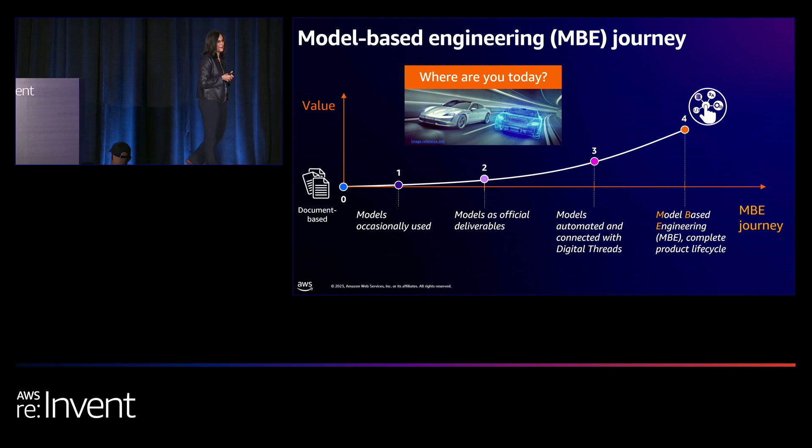That's why it is critical to build a closed-loop digital thread. As Peter Bilello, president and CEO of CIMdata, mentioned recently in a webinar on product lifecycle management, cloud is the technical foundation for the digital thread.

Now, diving deeper into the product engineering and development activities, we identified 6 specific areas where AWS and our partners play a key role for our customers.

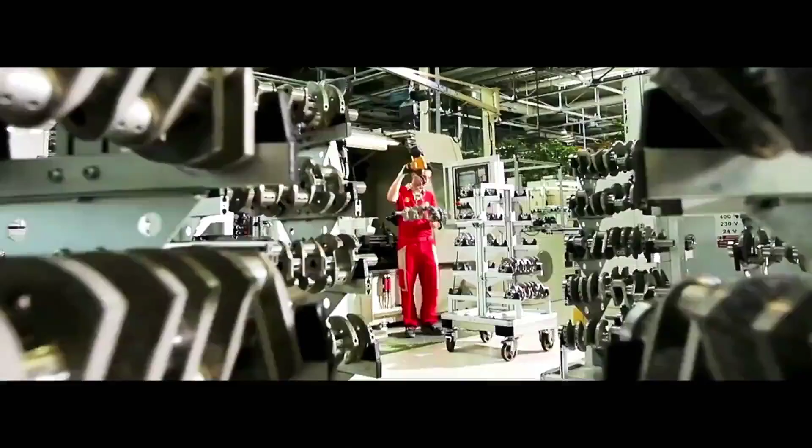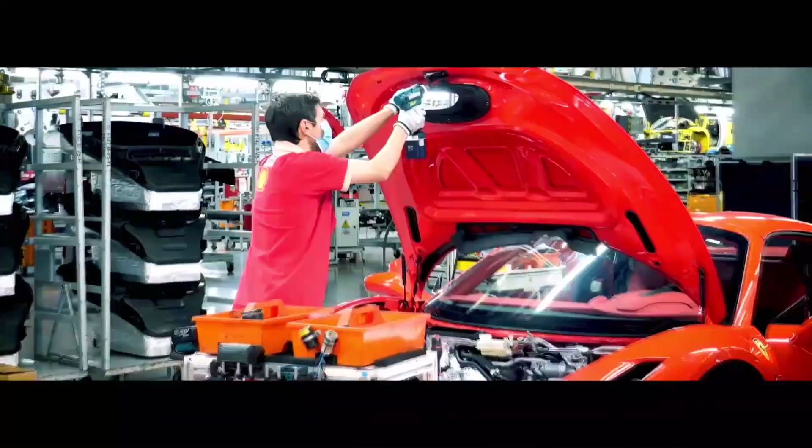How do you tell the story of a passion? A passion born of the spirit of racing, carried in the hearts of enthusiasts everywhere, that defies time, age, language, and culture, that unites young and old, individuals and teams, employees and owners in a lifelong sense of belonging. How do you capture the constant desire to push boundaries, master new technologies, adapt and evolve, to blend tradition and innovation, yet still stay true to your DNA? How do you capture the essence of what must be lived to be understood? For this is the essence of what it means to be Ferrari - to epitomize the power of lifelong passion, the beauty of limitless human achievement, creating timeless icons for a changing world.

We cannot describe passion. We can only live it. Fantastic. Our passion lives on emotions which transcend the road and track.

It sets ambitious targets and expectations to match tradition with innovation. It is required to feed the ability to provide revolutionary technological solutions with exceptional artisanal craftsmanship, which allow us to create icons that stay timeless.

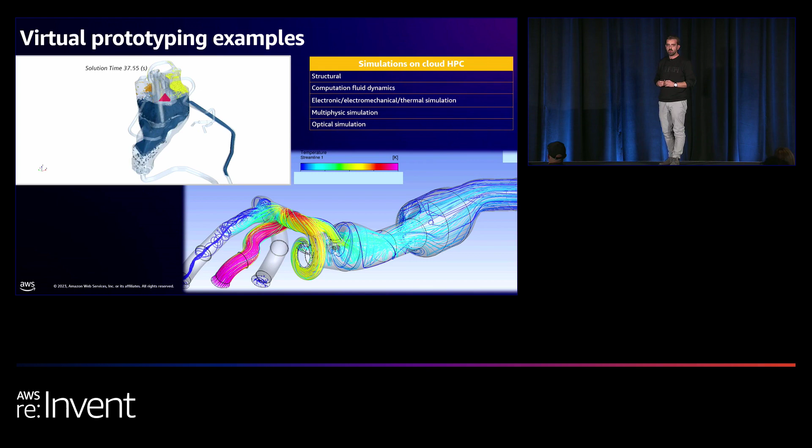Even if CAE gives us the opportunity to solve typical engineering problems like structural behavior prediction and fluid mechanics simulation, it was required to rethink another approach regarding how to deliver the computational resources to our engineering teams. And here the cloud comes into play.

Let's see a typical application field for CAE, which is high-performance computing, or HPC. Our HPC hybrid architecture in the AWS cloud leverages some cloud-native services. Let's see some of them.

First of all, direct connect between AWS and Maranello for a high-speed performance network. Second, AWS ParallelCluster, the core component of our hybrid architecture, with its compute nodes for calculations and the head node for orchestrating them. Third, the RDBMS service in Amazon Aurora for keeping track of our job scheduling history.

And finally, Amazon FSx for Lustre for high-performance NFS sharing, plus Amazon S3 for data tiering and keeping our storage costs low.

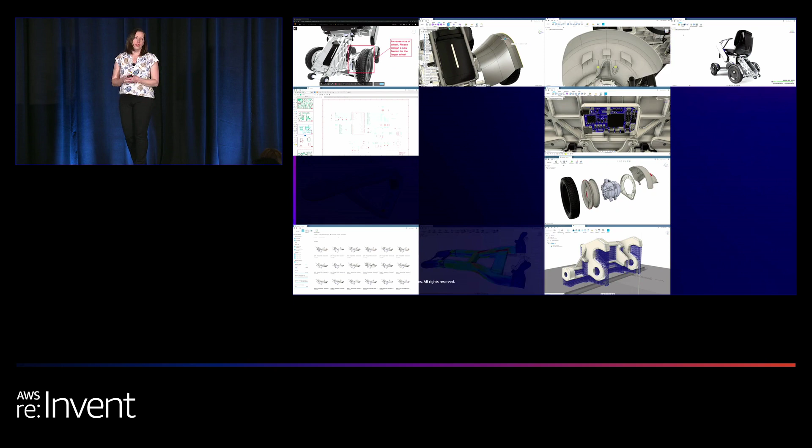And underpinning all of that is AWS. We need a connected technology stack to connect things like design and compute to create workflows that flow within and across all of these industries. A prime example of this is with Autodesk Fusion. Fusion connects all of your tools in the manufacturing space. So design, simulation, documentation, manufacturing, electronics, rendering, you name it, all in one platform.

We started Fusion because we saw that you needed a single environment for design and make workflows, a place where data can move easily for different kinds of teams and people to work together across different systems and locations. And partnering with AWS, we've been able to optimize how we leverage the cloud so that we can offer this tool with really sophisticated workflows at an accessible price.

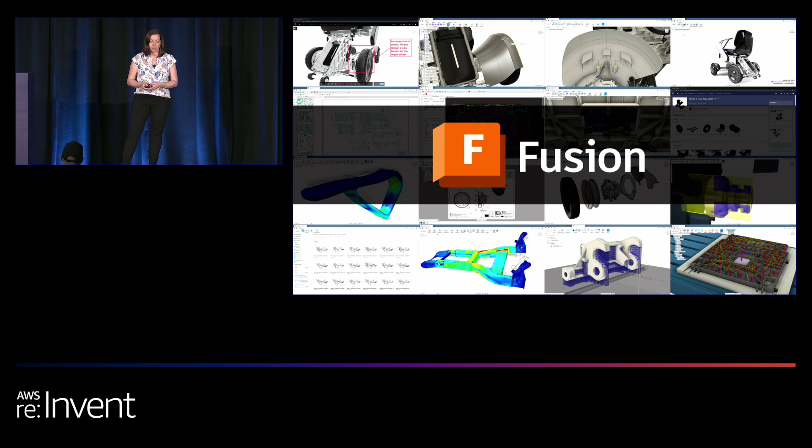And so we are using tools like Autodesk AI tools to really help wrangle that complexity. So we have Autodesk AI tools in Fusion and in our other software across the Autodesk Design Make platform. So we're a software company.

In order to create these AI-powered tools, we require a lot from our technology stack. And it's the kind of things that we get from AWS. We need high performance compute in order to do a lot of this computation. You, our customers, trust us with your business. 6 million people trust us with their business. We have to keep your data secure, and we have to offer our services to you reliably. And as we're seeing very acutely this year, technology is changing all the time. So we need to be flexible and scalable to absorb new innovations and scale to greater sizes and further scope.

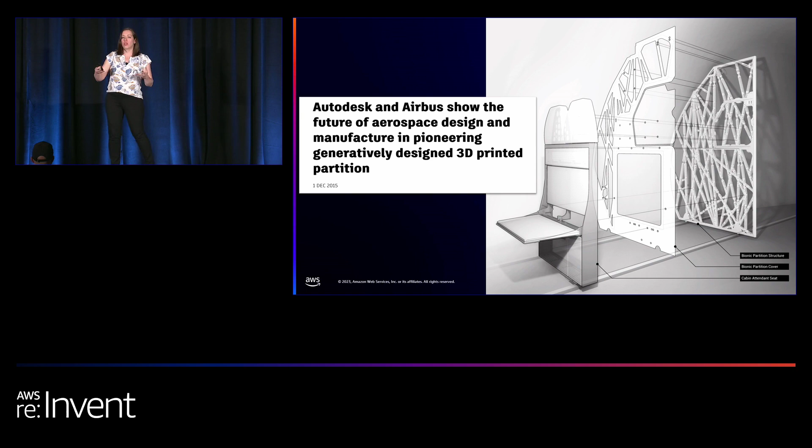And because we know all the equations, we can see the impact of different variables. And so what it offers to you is the ability to understand those trade-offs, to see what happens if you try to do this faster, what does that do to cost? If you try to make it lighter, what does it do to strength? And so you can actually see the interplay of those variables.

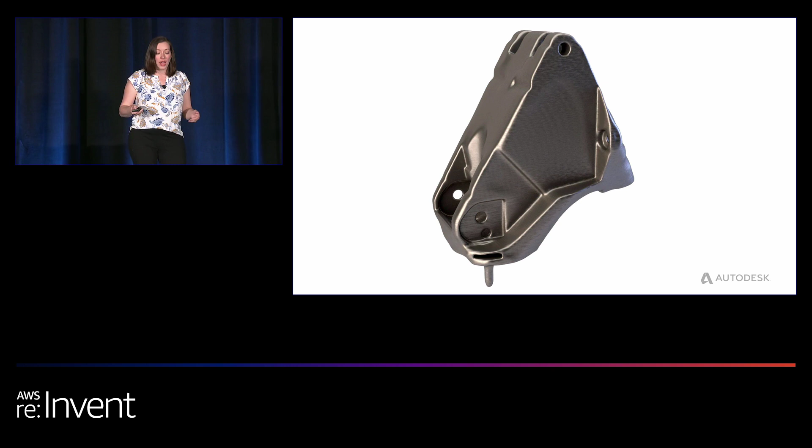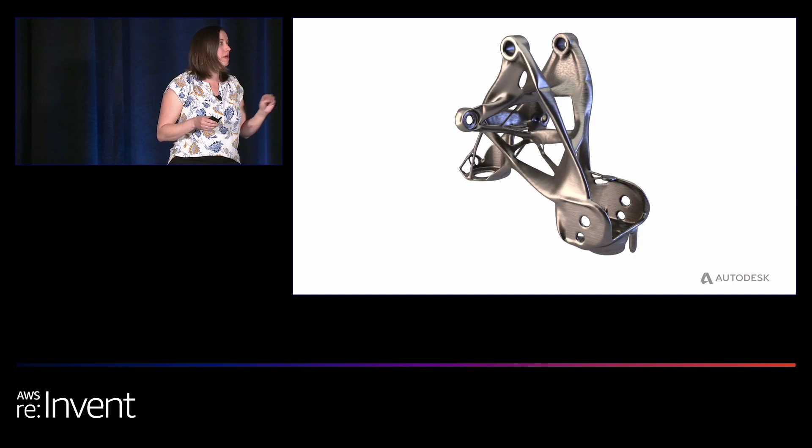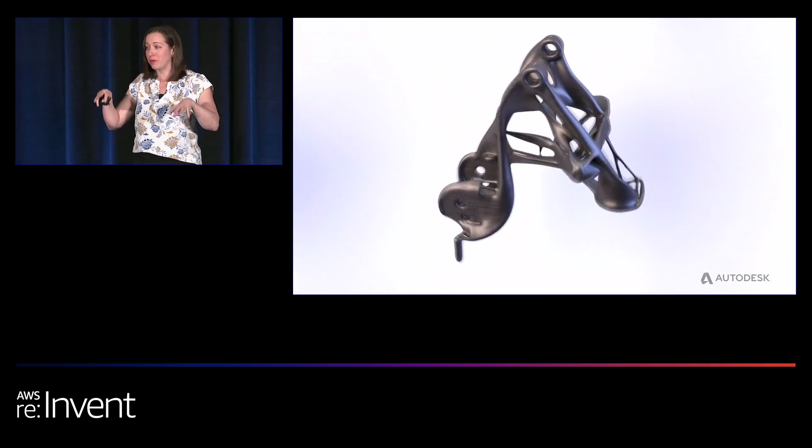So one example of this is General Motors used generative design and additive manufacturing to design and build a functional and lightweight seat bracket. Their goal was to optimize for weight, or mass, technically. So in the past, human designers would have made 2, maybe 3 designs for this challenge. But those human designers partnered with our software, made 150 viable options. We actually had to train a machine learning model to group these options to make it possible for users to navigate these choices.

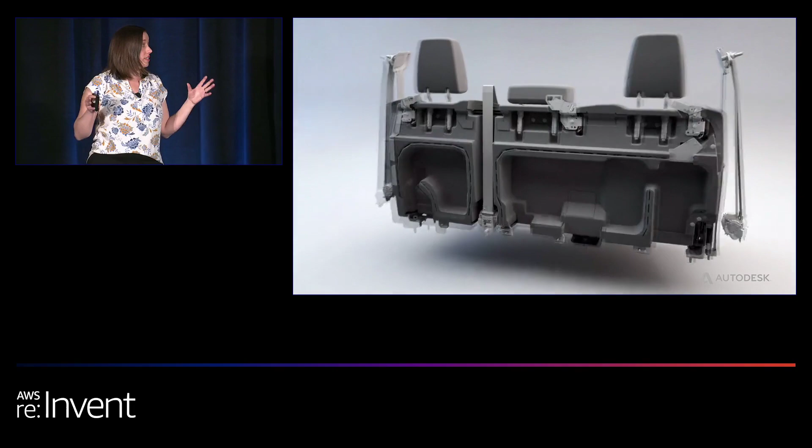Ultimately, they designed a seat bracket that was 40% lighter, 20% stronger, and consolidated 8 different parts down to 1. Part consolidation really is helpful for the assembly process, and making a part lighter and stronger is obviously better for the life cycle of that vehicle.

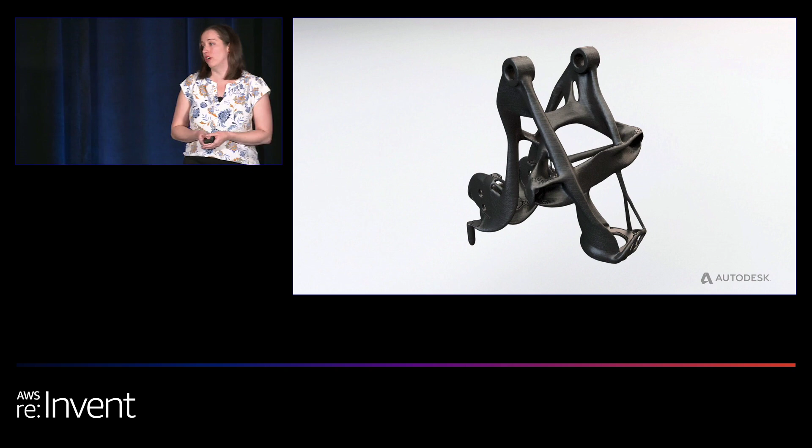So AWS was essential to this tool. In order to compute and generate hundreds of designs and display them in a way that someone could explore that design space required a really sophisticated backend. So we worked with AWS and we created a backend with parallel compute that uses both GPU and CPU. It would not have been possible to make generative design without AWS's tools.

So that was back in 2015. Over the years, we've kept expanding generative design. With the fact that we have all these AWS components, we can kind of mix and match and recompose new workflows using some of our old tech and adding in new technology. And that's how we expanded generative design to include things like generative fluids and automated modeling.

So generative design is great for structural components, but I mentioned it's simulation-based, and has anyone used a simulation tool? Anyone know? Okay, I see some hands. You can tell your peers. It can be a bit of a challenging environment for people. It's a really different kind of user interface than a design space.

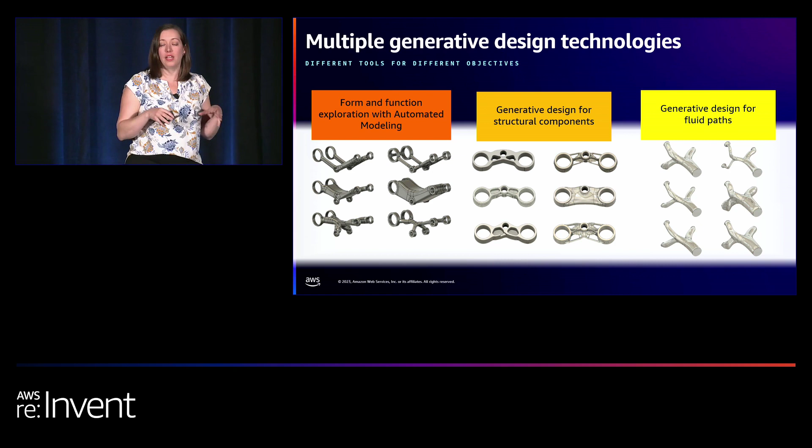And what we found was that not everyone found generative design for structural components as accessible. And so we created the automated modeling tool to put generative design in a design space which is more comfortable for some users.

Also, over the years, we've expanded generative design to cover multiple manufacturing methods. So the GM example used additive manufacturing. But additive manufacturing is not really the best manufacturing method or appropriate for all use cases. So we needed to add additional equations and additional capabilities to generative design to be able to offer manufacturing methods that were relevant to all of our different use cases.

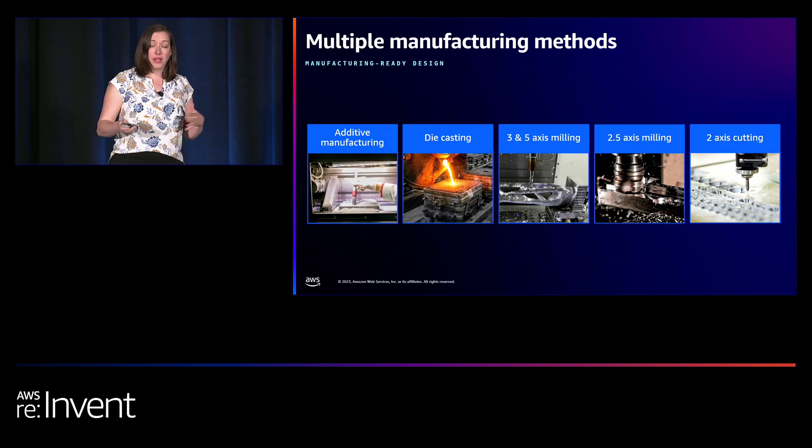So now generative design shoves those more equations in, and it can support additive, die casting, 3- and 5-axis milling, 2.5-axis milling, and 2-axis cutting. And because we have all those equations, we can really help users understand how their choice of manufacturing method impacts their decisions. So MJK Performance creates parts for performance motorcycles.

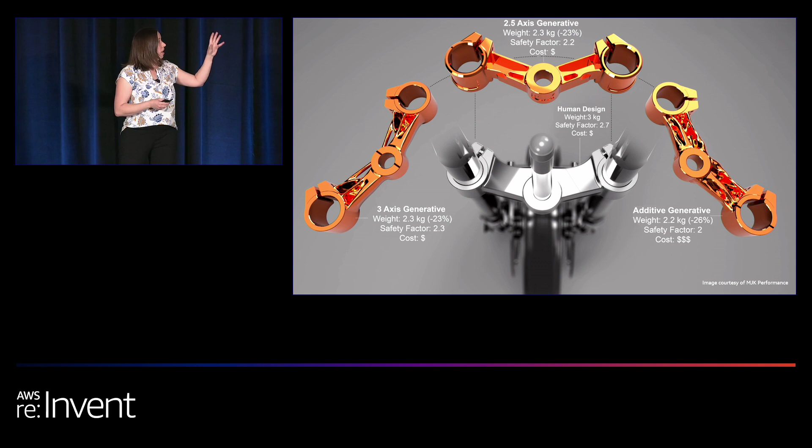They use generative design to design a triple clamp. And so there are 3 designs that they compared to the human design in the center. So you might be able to see, depending on the text, the additive design was by far the lightest. But based on their production volume, way too expensive. So the 2.5-axis design was 23% lighter and worked with their production volume. It was a more manageable cost.

And so using generative design, they were able to go from an idea to a computer model to a physical prototype in their hands in a matter of hours.

As I said before, the underlying building blocks of generative design use AWS. So we can componentize them and mix and match. We do A/B testing, add new stuff, and it lets us continuously improve this tool without disrupting any existing user.

In our most recent update, we improved our structural design solver. Mauro and Giovanni talked about solve times as well. It's really important to be as fast and efficient as possible with this. We now support five manufacturing methods, and we've done a lot of work to increase the robustness and resiliency of our solver.

In order to offer flexible business models, we have to use our computing resources really effectively. So we use AWS for a mix of GPUs and CPUs. We use batch and step functions, and we use spot instances to use exactly the right amount of compute at the right time so that no resources are wasted. That's how we use AWS to really handle the multivariable aspect of this problem.

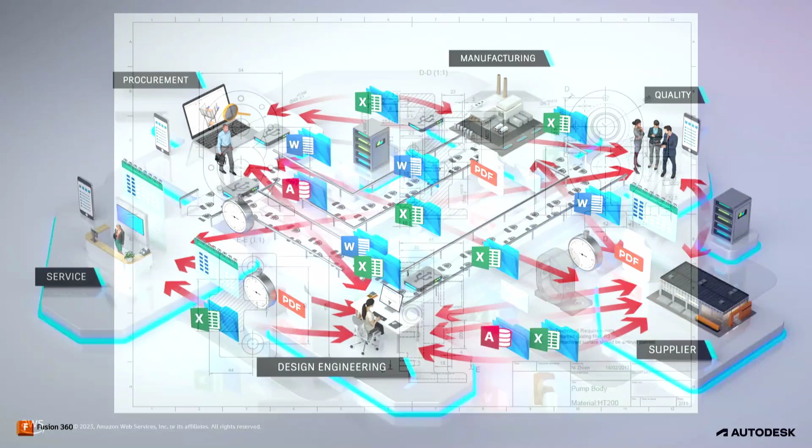So drawings are a great example of this. Manufacturing drawings are super important. Basically every manufactured part needs one. It's critical to ensure that part is created as it needs to be, that it has all the right dimensions in the critical places. But these are really tedious to make. They can take hours to make. And all they're really doing is illustrating information that's already in the 3D model. So it requires a bunch of time and particular domain expertise, but it's not particularly creative. And folks that do it would love to do it faster.

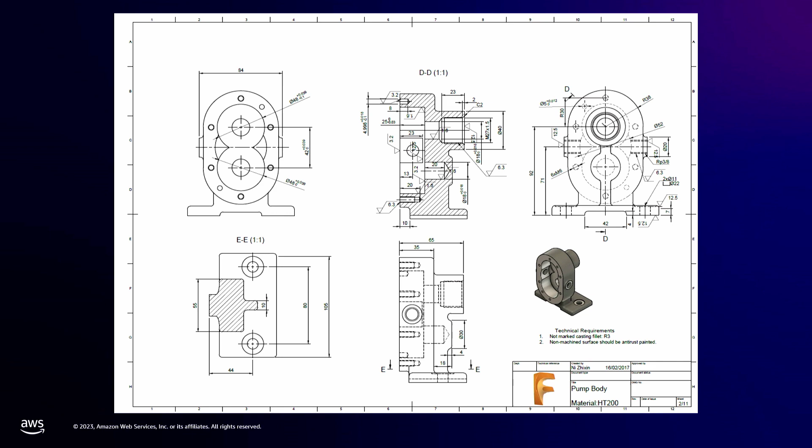So now users can request automated drawings. This is coming out in the next build of Fusion. You take your assembly, click a button, that assembly gets sent to the cloud with AWS technology. It gets churned, and then you get notified when your drawing is ready. In this case, this person now has 24 sheets automatically made.

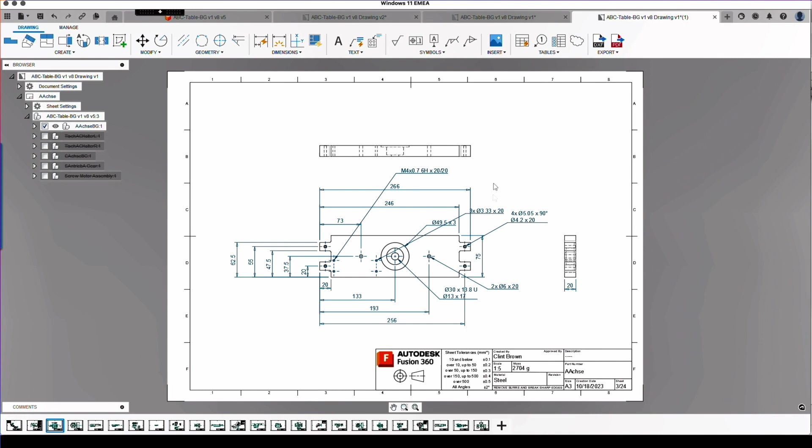Part of what makes drawings really hard to automate is that there's no one right way to do it. It's sort of half art, half science. Depending on your manufacturing method and your company's standards, you may need the drawing set up in a different way. So we offer people a menu, sort of a number of recipes, so you get to control how your drawing ultimately looks.

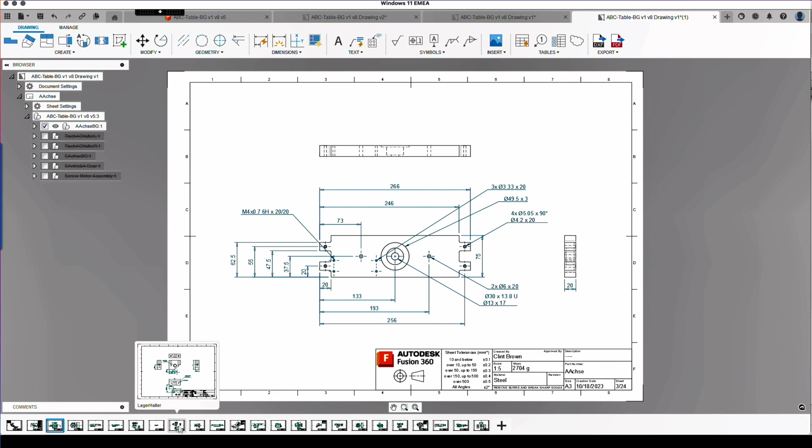The dimensions get placed on the sheet. Everything is fully parametric and editable, so you can still make your finishing touches, move a dimension here, add one there, bada bing, bada boom. But now we've saved hundreds of hours of time. This drawing is fully editable, and we're really excited about what this means to free up everybody's time to do more interesting problems.

Generative design and automated drawings help superpower our customers to achieve their goals faster. Both of them use rules, equations, and heuristics under the hood. But there are some problems we really can't solve that way, and that's where machine learning comes into play. We are leveraging machine learning to develop more AI-powered tools for those challenges, and we need dedicated tools as a software company in order to do that.

So over the last few years, we created the Autodesk machine learning platform for all of our internal machine learning teams to access the tools they need. The platform is built on top of AWS, and it uses Amazon SageMaker, batch, step functions, and other AWS components to optimize how we use our resources. As we scale our machine learning footprint, it becomes essential to manage things like compute and data storage effectively.

The platform has different tools to support different parts of the machine learning lifecycle, but it kind of chunks out to obtaining and managing your data, training models, deploying models, and monitoring how they do in a production environment. With this platform, it's easier for all software developers to work with machine learning models effectively. So for non-experts in machine learning, who are standard software developers, it makes off-the-shelf models easier to access. Folks can grab these models and plug them into their workflows really effectively and quickly.

And it enables machine learning researchers to access increasingly powerful compute to develop and train new models, create data sets, and do things like training on data without copying or moving it. When you have really large data sets, that kind of thing is really important. And also with data governance, ensuring that data stays in a safe place. This platform lets us apply governance rules to ensure we can control who has access to what data and where that data lives.

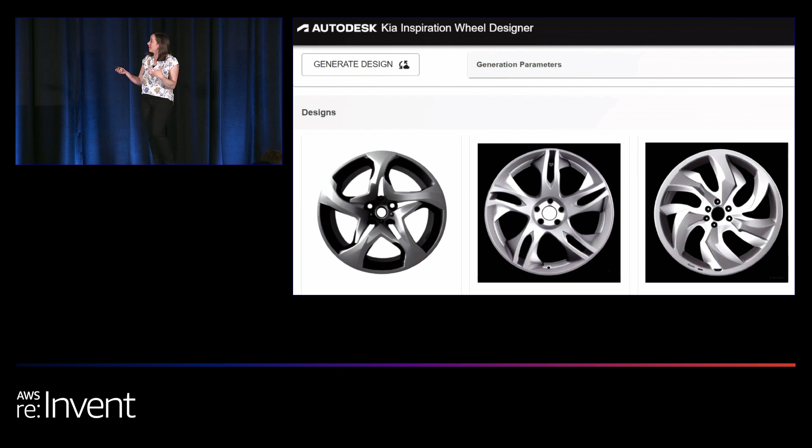Building on the work of the AI Lab, we are exploring applications of generative AI and how it can further help us tackle challenges in the manufacturing industry. One area we're really looking at right now is how to get a design out of a designer's head and into a computer. For example, Autodesk Research partnered with Kia to build a generative AI tool for concept generation for wheel designs. They used AWS to generate the data they needed and created a model that understood intangible concepts like dynamic and sporty, and could also understand design principles like symmetry. The tool enables Kia designers to quickly generate and modify their wheel designs and then ultimately create a 3D model.

Going further in the automotive space, kind of the theme of the day, Autodesk recently acquired Blank AI. This tool allows any automotive designer to encode their brand's specific design DNA and then generate and tweak 3D designs that still had the essence of that particular automotive brand. The designer can make adjustments using semantic controls - dynamic, unique, bold - and immediately visualize the outcome in a rendering environment. We're hard at work onboarding this new capability onto the AWS platform and using AWS to help scale it to more users. We'll keep working with AWS to continuously improve and expand these workflows.

I'm really excited to see how folks like you can use Autodesk AI today and the new tools that we will continue to share with you. I'm going to pass it back to Alex to bring us home.